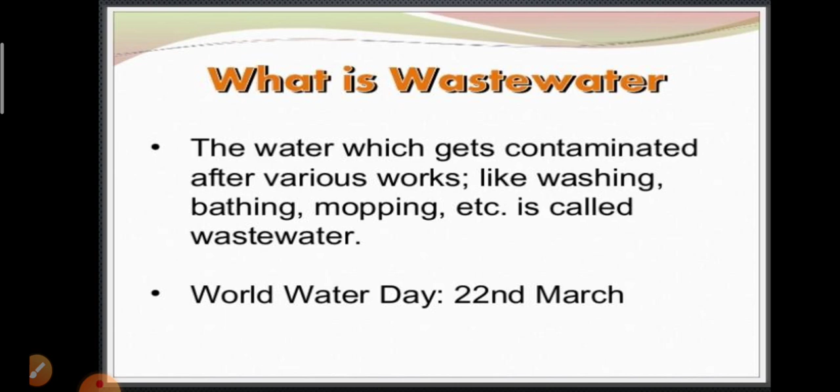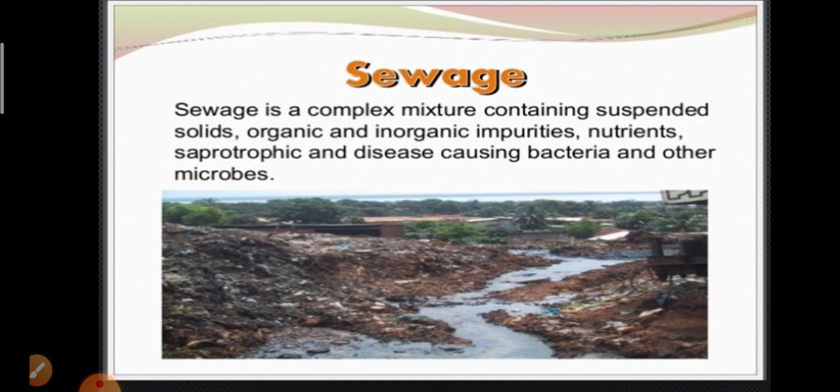Sewage. Sewage is a complex mixture containing suspended solids, organic and inorganic impurities, nutrients, saprotrophic and disease causing bacteria and other microbes. What does sewage contain? Organic impurities, inorganic impurities, nutrients, bacteria, and microbes. Organic impurities like human feces, animal waste, oil, urea, pesticides, herbicides, fruits, and vegetable waste. These all include organic impurities.

The inorganic impurities include nitrates, phosphates, metals; nutrients like phosphorus and nitrogen; bacteria such as those which cause cholera and typhoid. Cholera causing bacteria is Vibrio cholerae and typhoid causing bacteria is Salmonella typhi; and other microbes such as protozoans, which cause dysentery. These are the components of sewage.

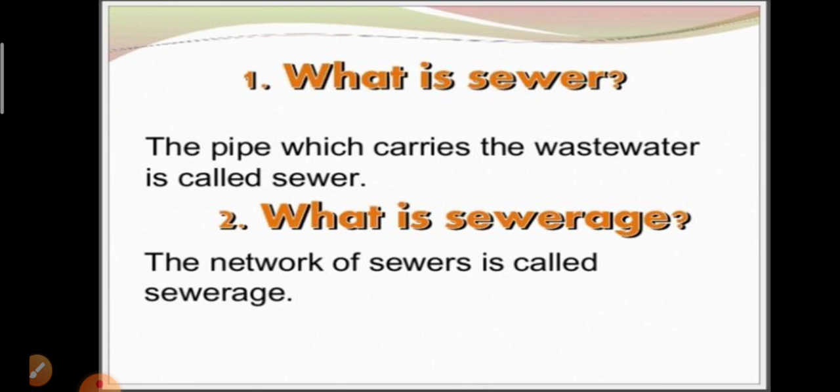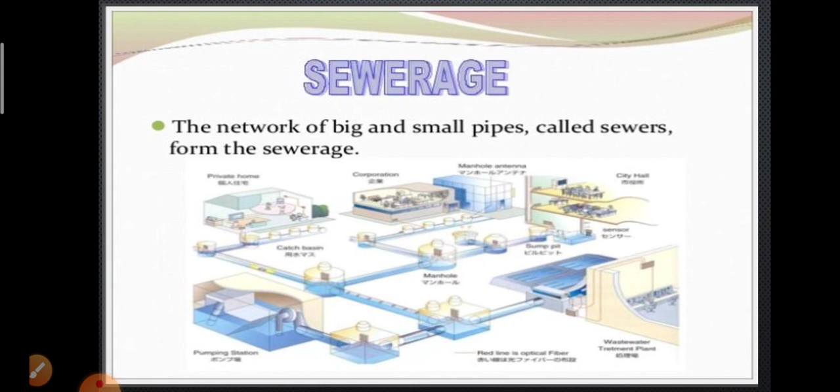And what is sewer? The pipe which carries the wastewater is called sewer. And what is sewerage? The network of sewers is called sewerage. You can see here, this is the sewage, this is the sewer, and the network formed by sewers is said to be sewerage. Okay. The network of big and small pipes called sewers forms sewerage.

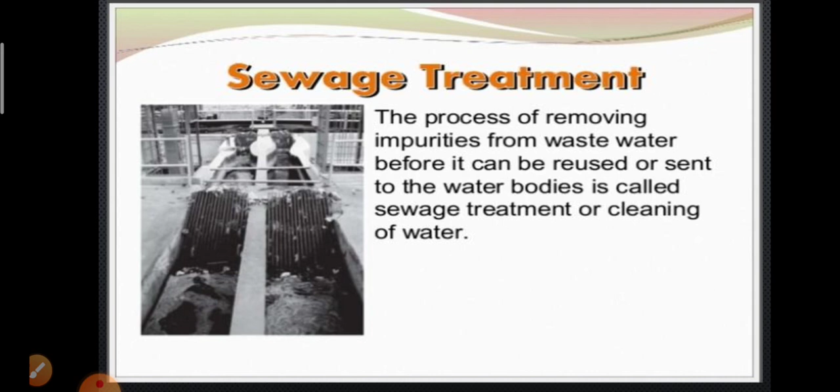Sewage treatment. The process of removing impurities from wastewater before it can be reused or sent to the water bodies is called sewage treatment or cleaning of water. What is sewage treatment? It is the process of cleaning of water. Here, impurities are removed from the wastewater before it can be reused or sent to the water bodies. This process is called sewage treatment.

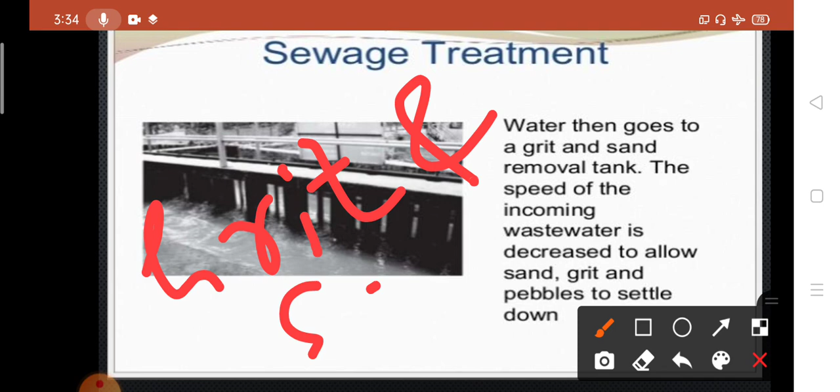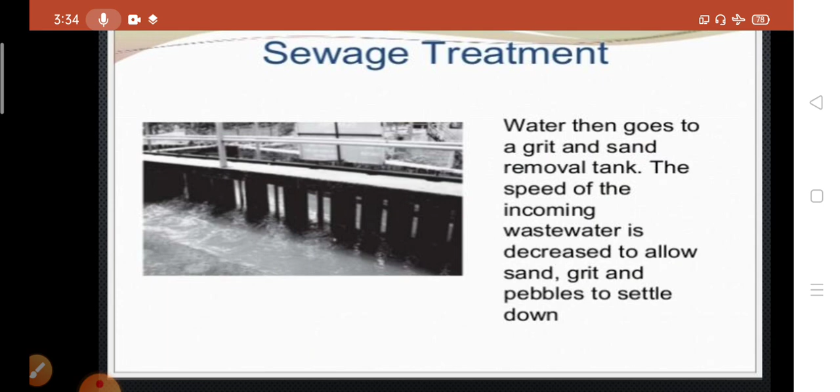Water then goes to a grit and sand removal tank. The speed of the incoming wastewater is decreased to allow sand, grit and pebbles to settle down. Here you can see the grit and sand removal tanks. So this picture is the grit and sand removal tank. Here the speed of the incoming wastewater is decreased, which allows sand, grit and pebbles to settle down. By this the sand, grit and pebbles can be removed from the wastewater.

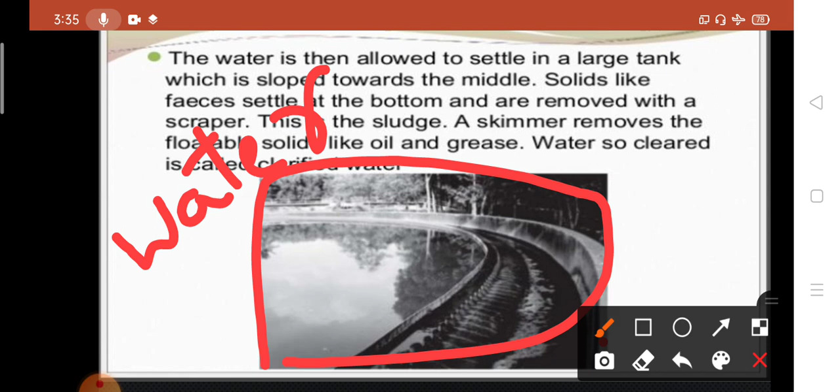The water is then allowed to settle in a large tank which is sloped towards the middle. The solids like feces settle at the bottom and are removed with a scraper. This is the sludge. A skimmer removes the floatable solids like oil and grease. Water so cleared is called clarified water. So this is the image of a water clarifier.

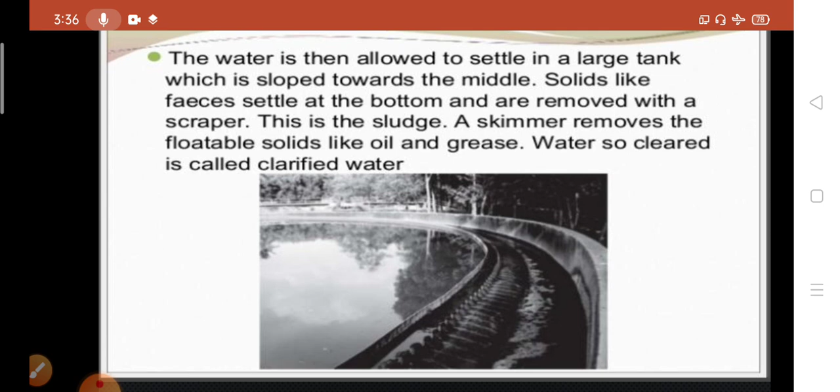What happens here? The water from the grit and sand tank is allowed to settle in the large tank which is sloped towards the middle. The solids like feces settle at the bottom and are removed by the scraper. This is called sludge. The oil and grease float on the water, so the skimmer removes the floatable oil and grease. By this the water becomes clear. This is called clarified water.

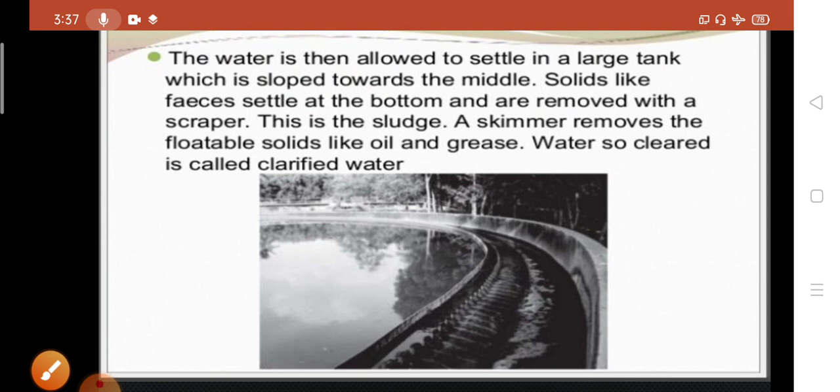Then the sludge is transferred to a separate tank where it is decomposed by anaerobic bacteria. The biogas produced in the process can be used as fuel or to produce electricity. The solid materials collected in the water clarifier are known as sludge. That sludge is transferred to a separate tank where it is decomposed by anaerobic bacteria, and biogas is produced in this process. This biogas is used as a fuel, and can also be used for the production of electricity.

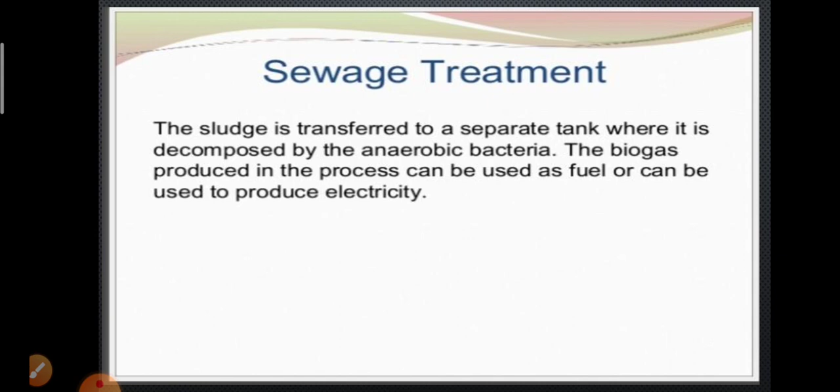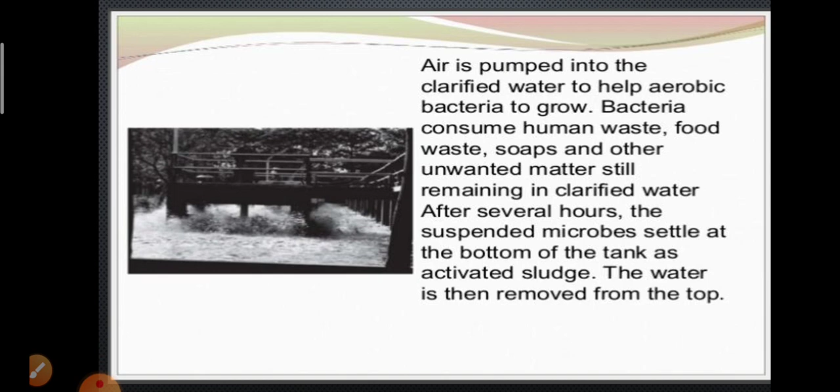Then air is pumped into the clarified water to help aerobic bacteria to grow. Bacteria consume human waste, food waste, soaps, and unwanted matter still remaining in clarified water. After several hours, the suspended microbes settle at the bottom of the tank as activated sludge. The water is then removed from the top.

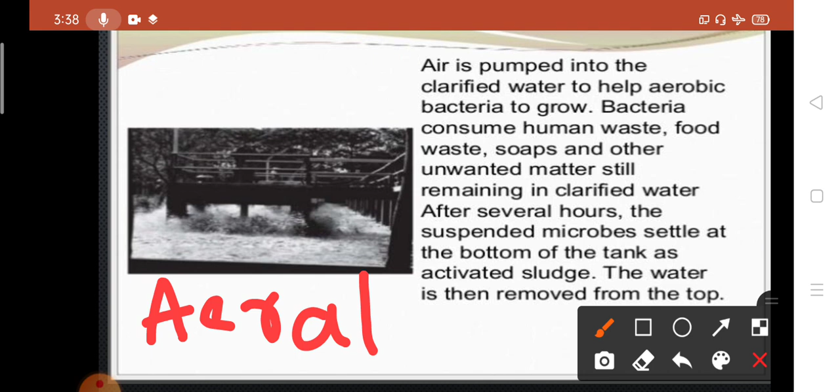So here you can see the image of aerator. This is the aerator. Air is pumped into the clarified water to help the aerobic bacteria to grow. These bacteria consume the human waste, food waste, soap, and other unwanted matter that still remained in the clarified water. After several hours, the suspended microbes settle at the bottom of the tank as activated sludge. The water is removed from the top.

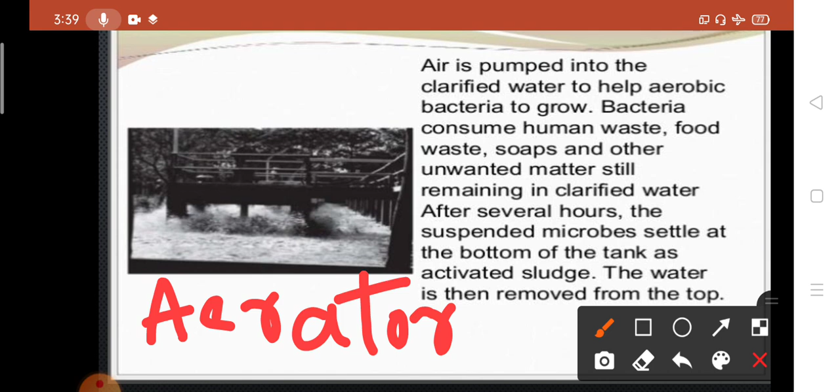Okay. Next. The activated sludge is about 97% water. The water is removed by sand drying beds or machines. Dried sludge is used as a manure, returning organic matter and nutrients to the soil. The treated water has a very low level of organic material and suspended matter. It is discharged into a sea, a river, or into the ground. Nature cleans it up further.

Sometimes it may be necessary to disinfect water with chemicals like chlorine and ozone before releasing it into the distribution system. So what happens here? The activated sludge is about 97% water. That water is removed by the sand drying beds or machines. Okay, this solid dried sludge is used as a manure, returning the organic matter and nutrients to the soil.

This solid material is used as a manure and it gives nutrients to the soil. Then that water has a very low level of organic material and suspended materials. It is half cleaned. It is then discharged into the sea, a river, or to the ground. This water is discharged into the water bodies as it is low in organic material. Okay, then nature cleans it up further.

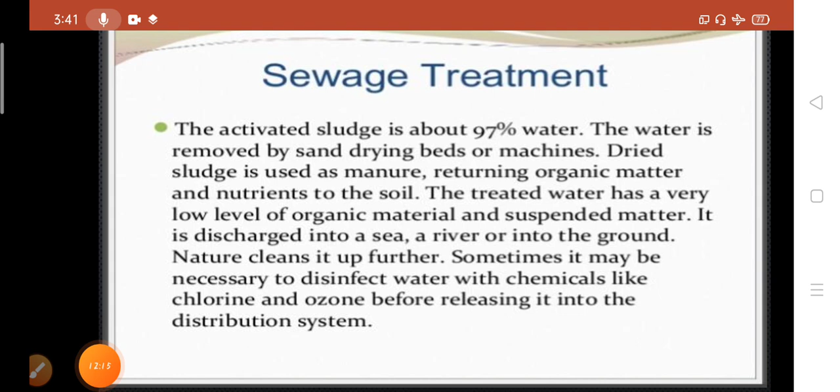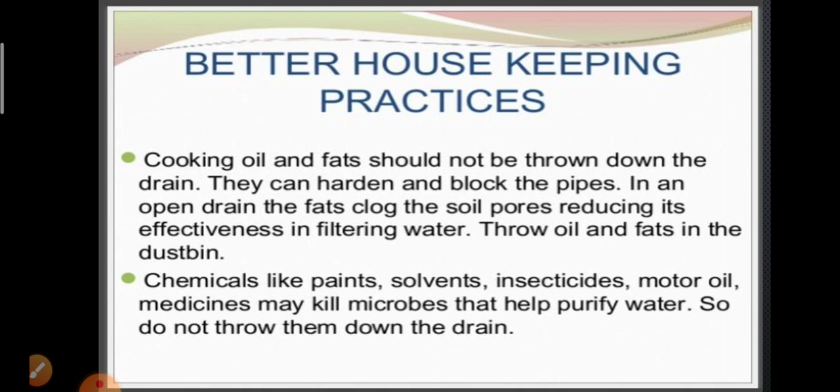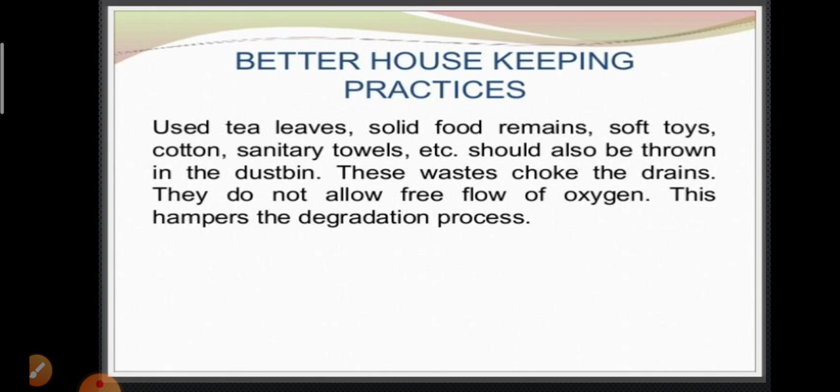Used tea leaves, solid food remains, soft toys, cotton, sanitary towels, etc. should also be thrown in the dustbin. These wastes choke the drains. They do not allow free flow of oxygen. This hampers the degradation process. You have to throw the tea leaves, solid food remains, soft toys, cotton, sanitary towels, etc. in the dustbins. Okay.

Sanitation. Next point is sanitation. Poor sanitation and contaminated drinking water is the cause of a large number of diseases. Poor sanitation and contaminated drinking water cause a large number of diseases.

A very large fraction of our people defecates in the open, on dry river beds, on railway tracks, near fields, and many a time directly in the water. It may cause water pollution and soil pollution. Both the surface water and groundwater get polluted.

A large fraction of our people defecates in the open on dry riverbeds. We throw the waste materials in water bodies or on the surface of the earth, which may cause water pollution and soil pollution. This may pollute the surface water as well as groundwater. So you should not throw the wastes into the water bodies.

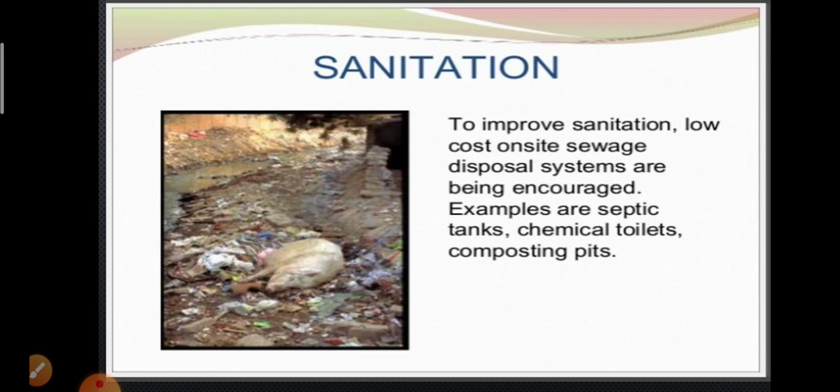Sanitation at public places. In railway stations, bus depots, airports, hospitals, a large amount of waste is generated. It must be disposed of properly, otherwise epidemics could break out. The wastes at railway stations, bus depots, airports, hospitals should be disposed of in a proper manner, or they can cause epidemic diseases. We should not scatter litter anywhere. If there is no dustbin in sight, we should carry the litter home and throw it in the dustbin.

So this is about the wastewater, how we can treat the wastewater, how we can follow sanitation at public places too, and how we can follow better housekeeping practices. Hope you understood the chapter wastewater story.